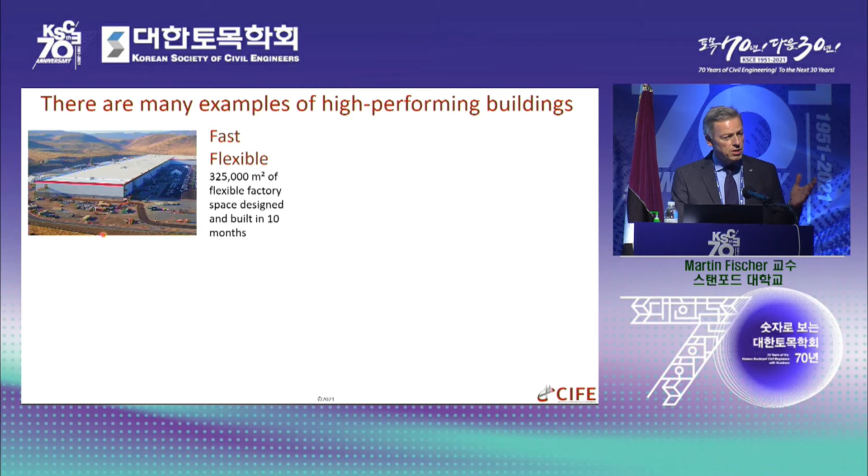So walking around Seoul yesterday for the first time, I saw many remarkable structures, and we see also many remarkable structures around the world. We see many examples of high-performing buildings. Some are created extremely fast and flexibly, like the Gigafactory in Sparks by Reno, Nevada.

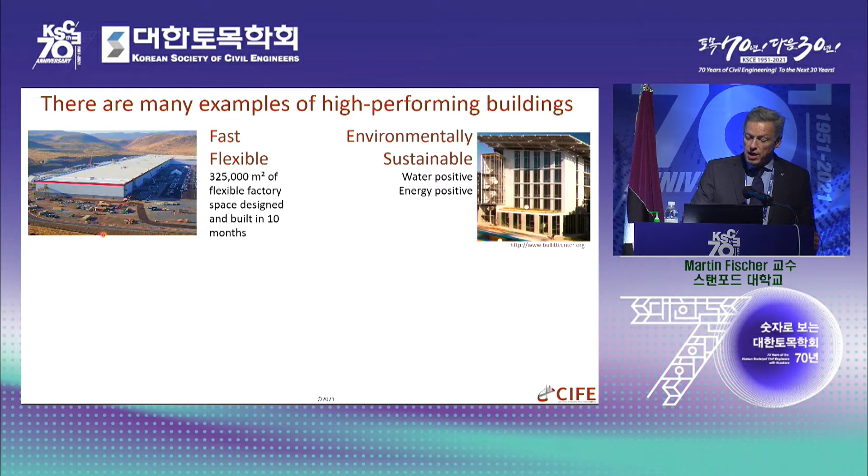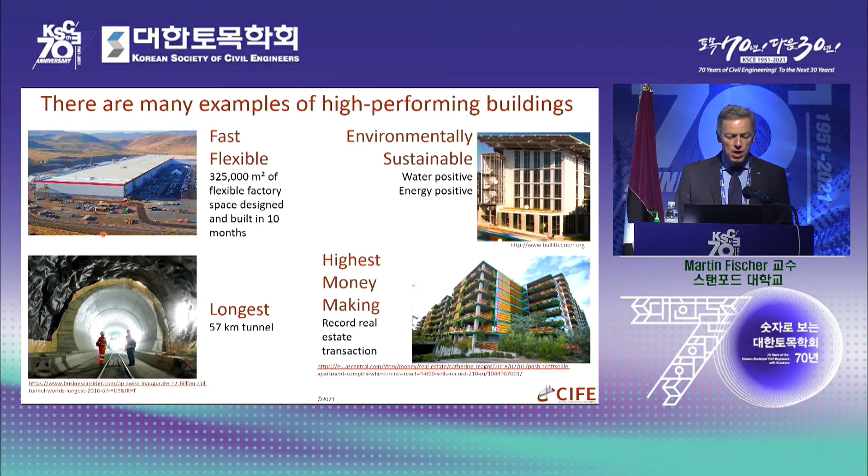Highly environmentally sustainable, water and energy positive, sustainable and high economic return, or just very impactful because of their size, like in my native Switzerland, the longest railroad tunnel. But we have to get more of these types of buildings, as I already mentioned.

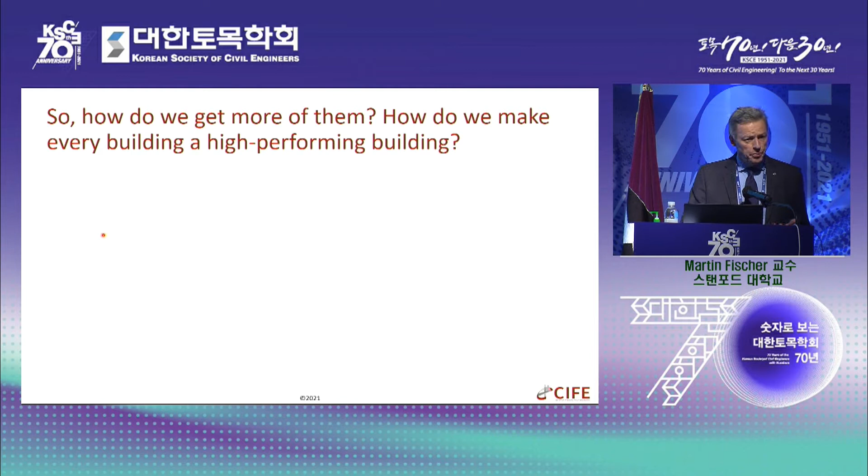So how do we get more of them? How do we make every building high-performing? And of course, technology will help us because it allows us to do things that we haven't done before.

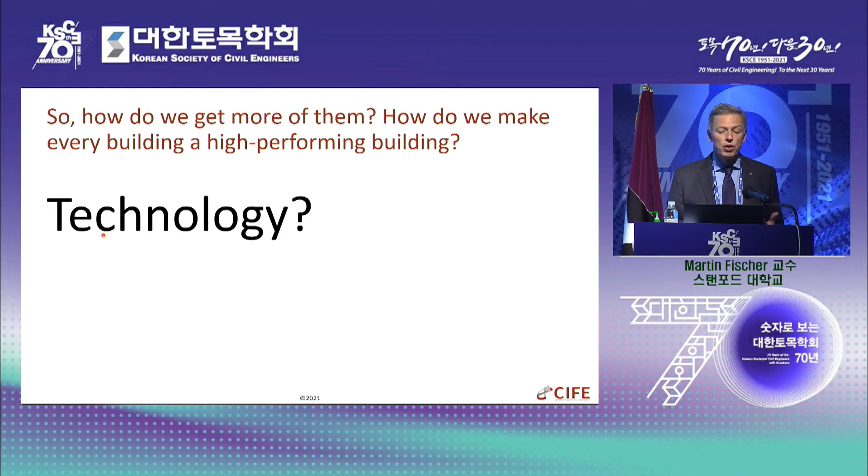So in that sense, technology will be extremely important because, as we heard, we have to do many things that we don't actually know yet how to do. And there is really an incredible number of technologies that are emerging. Just to name a few: many mobile technologies, cloud technologies, technologies around location, dimensional control, scanning, understanding basically the real environment in digital sense, machine learning, artificial intelligence, robotics, additive manufacturing, Internet of Things, virtual reality, augmented reality.

Each one of them is actually already a big deal and could have a big impact. But we hear every day about advancements in all of them, and together they will really enable a very different future of civil and environmental engineering.

So technology will help, but it's not enough. We also have to have a strategy and method. So I will introduce a strategy and method that we have found is very helpful to creating more high-performing buildings, and then share examples of advancing digitalization so that we can go beyond the current limits of performance for our projects.

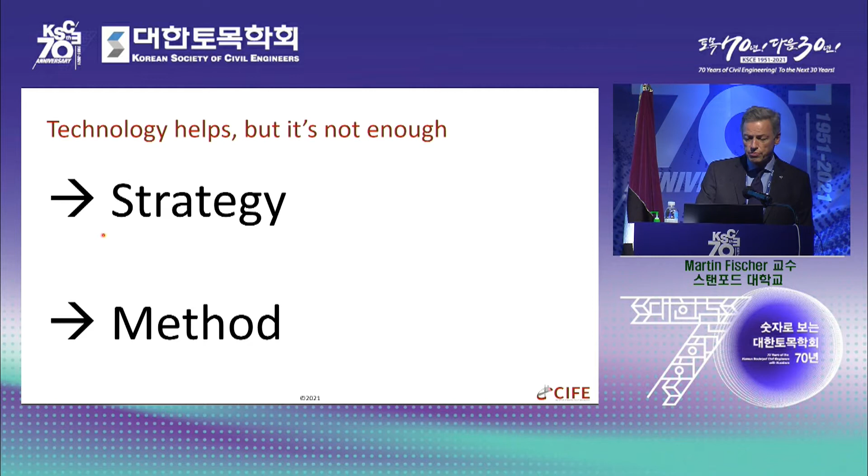So we have to start first with what we need to achieve. How do we know that a building is high-performing or a bridge is high-performing? How do we differentiate one from one that's not so high-performing? So we have to define characteristics for high-performing buildings.

When I use buildings, I really mean buildings like we're in, but also infrastructure as a general term. This is something that's actually been a bit of a surprise to me in my career. I've had the pleasure over the last decade to work with well over 2,000 professionals to advance their knowledge through professional education around the world. And what they struggle the most to do is to define for their project what is actually high performance. What are the objectives for the projects? It's really surprising, but that's what we have found.

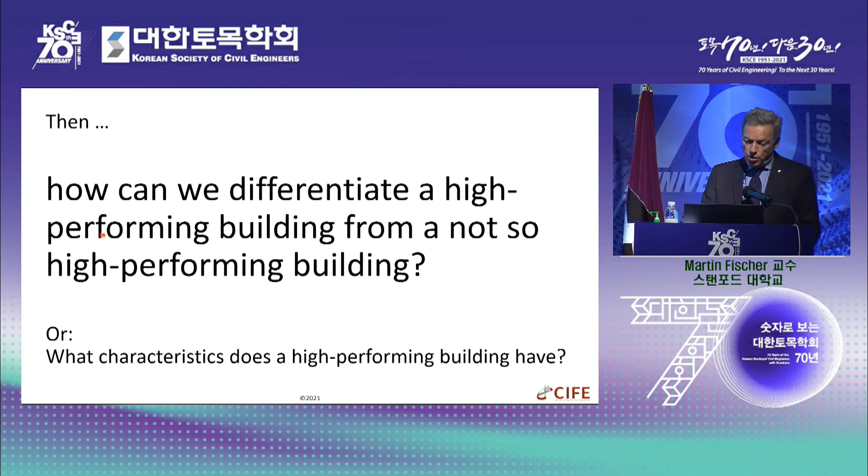First of all, a building or infrastructure has to be usable. Otherwise, what's the point? If it doesn't support its users in health and safety, functionality, and many other features, I think a building that is not usable is really wasteful. It also has to be buildable because, well, if you don't build it, then it doesn't exist and doesn't help the user. And there we have the classic objectives from safety, schedule, cost, and quality.

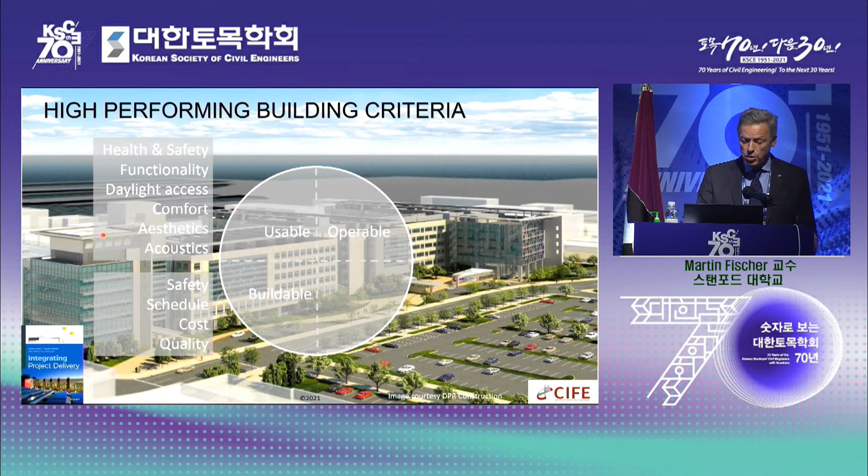And it has to be operable. The people running tunnels, running hospitals have to be able to do so safely, and with efficient energy and water consumption, but also efficient maintenance and operation procedures. And it has to be sustainable, economically, equitably, socially, and ecologically or environmentally. There's lots to do, right? You can see very few projects can say we are performing really at a very high level in all of these aspects.

And that's why we need to integrate the knowledge of all the project team members and support them with really the best tools possible that we can think of, that we can make.

So now that we know how to define, how to recognize a high-performing building from a not so high-performing one, what strategy should we use to get one?

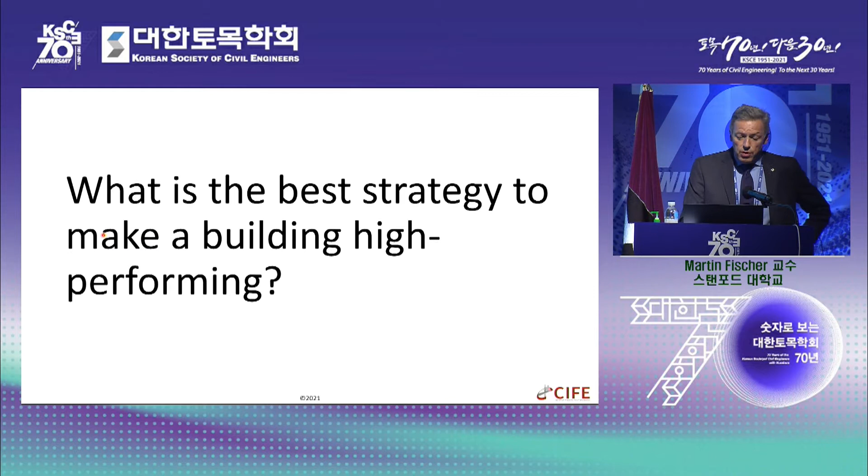As I was working on the book with my 3 co-authors, we really thought about this very hard because we wanted to create more high-performing buildings. So what would be a strategy for a building so that it would be more likely to be high-performing than not? The best strategy we could think of was that it needed to be a building for which the building systems are integrated, work together, are synergistic. That also goes for a tunnel, goes for a bridge, and so on.

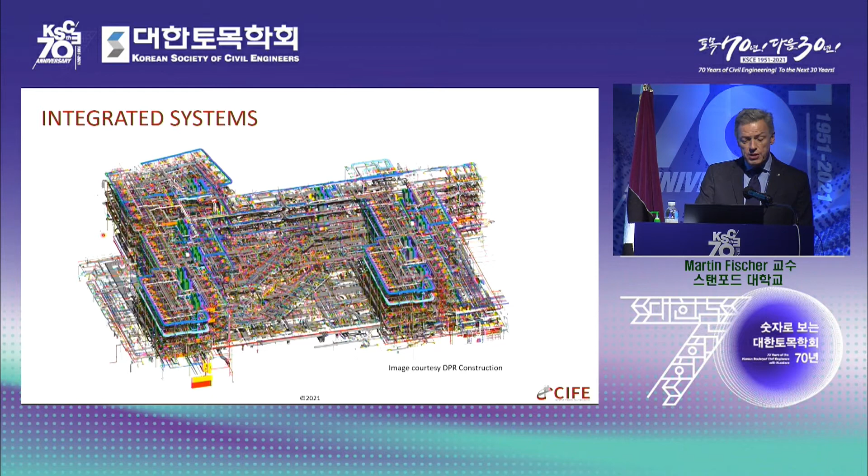We can understand the integration through computer models, not only, but certainly one important way to understand it here, the set of integrated systems for a large hospital in California.

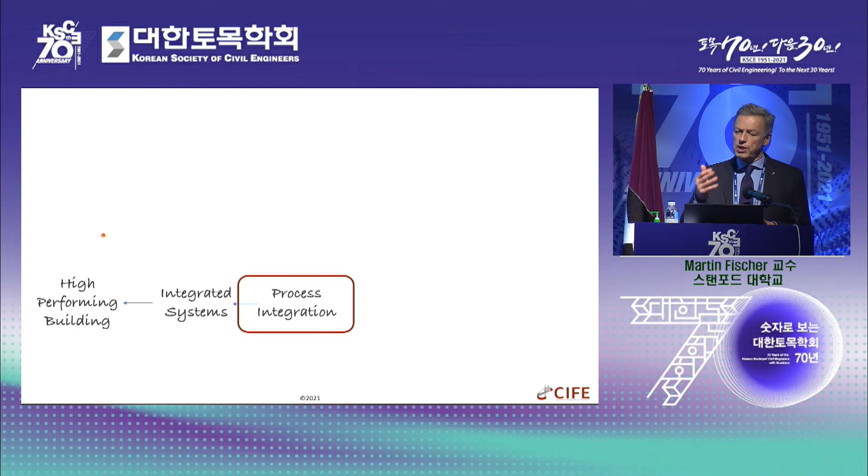So then how do we get a building that has integrated systems? Because that's what we have established is the best strategy for high performance. It means really that we need to integrate the processes, the workflows that create it. And this is quite a departure from what I see around the world, where I see many fragmented, isolated processes, siloed processes, as we say in English. So this is quite a change that we have to still work quite hard, I find, around the world to make happen in our industry.

Because it's crazy to think that separated processes would create miraculously a building with systems that happen to work together very nicely.

So to create integrated processes, we really need to ask the project team to make that happen, which also becomes an important part of creating an integrated organization, which is, of course, the best strategy to create these integrated processes. Because again, if we silo each of the disciplines, like we still often do in many parts of the world, by themselves, then we make it very difficult for those organizations to create integrated processes.

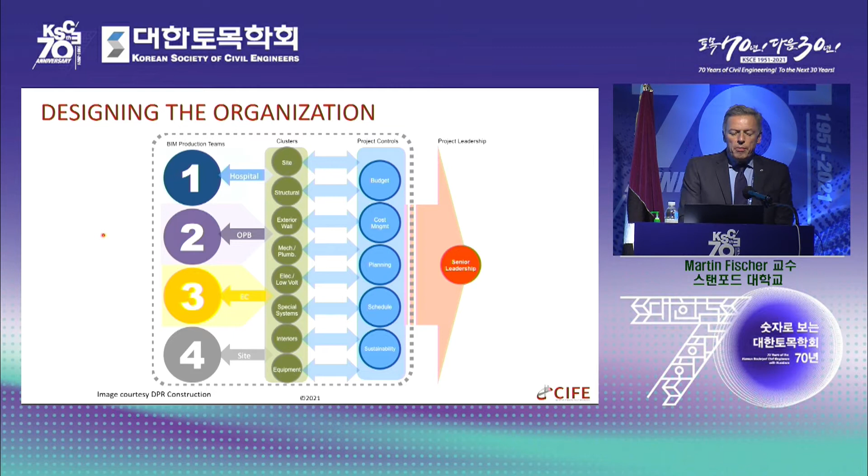An organization cannot do very much without good information. We have to bring the information from different parties together so it can support the organization. As one of my former PhD students said, the information should work for the organization, not the other way around. But too often today, we still have to work for the information, and then we lose focus on creating a high-performing building.

We see many emerging technologies, and now tools like BIM are very common. They connect design and construction, as you can see on this project in San Francisco. This is now very common around the world, I'm sure also here in Korea. What we have found is that a strategy of integrating information, the organization, the processes, and the technical systems gives you the best chance of creating a high-performing building.

As we reflected on that, we realized this is quite different from how many projects are done. They tend to be broken up by disciplines, broken up by phases, and it's really crazy to think that would create a high-performing building, a resilient building, a sustainable building, a building with a low carbon footprint or carbon neutral. So I think we have to get out of our current way of organizing projects into more integrated ways.

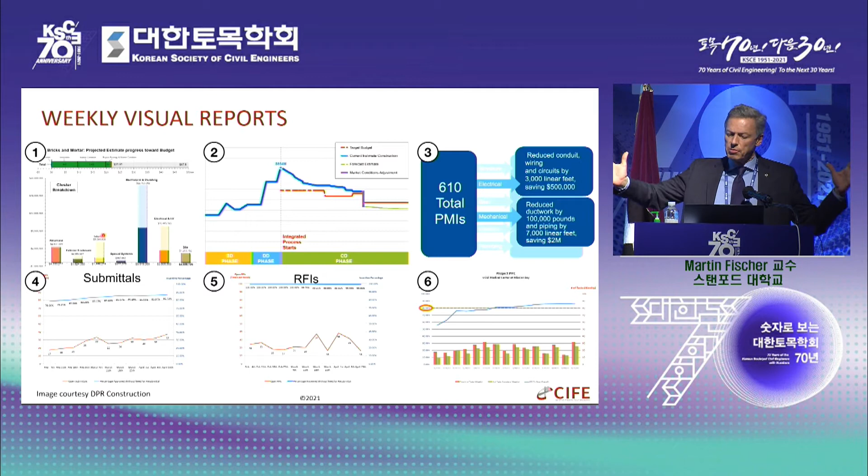Again, this was the same hospital in San Francisco. This was hugely impactful to show everybody publicly on the project team every week how the project is going, where we need to get better. It really galvanized them to a higher performance.

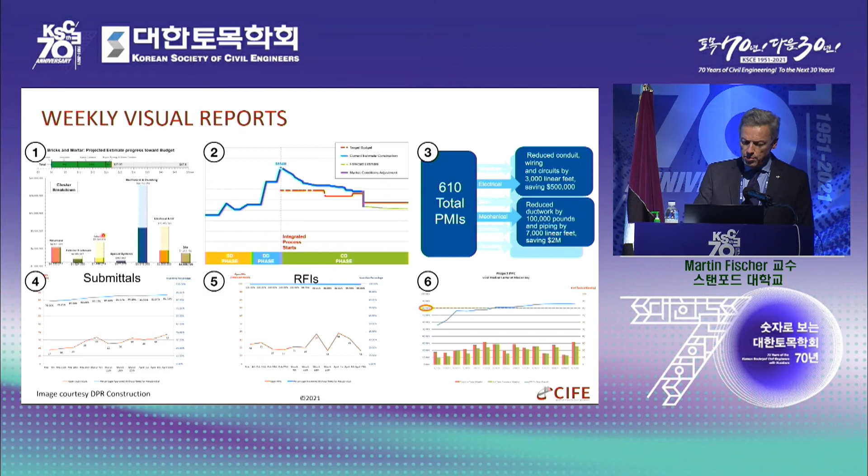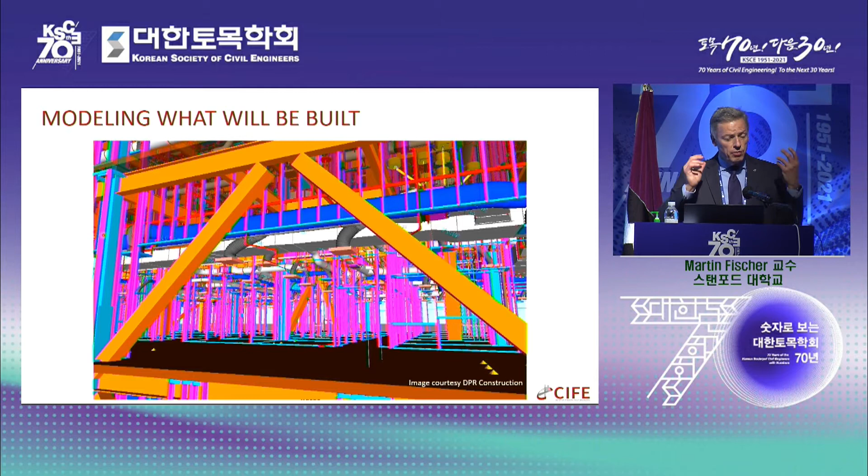To make this possible, the visualization of the current state and envisioned future state of projects is extremely important. So again, BIM, but also other visualization methods, as you will see later, are very impactful to avoid wasteful processes, to get everybody on the same page quickly, and to allow the vision from the design to be translated into construction. This allows us to connect the ideas and vision of the project team with the performance the building needs to have.

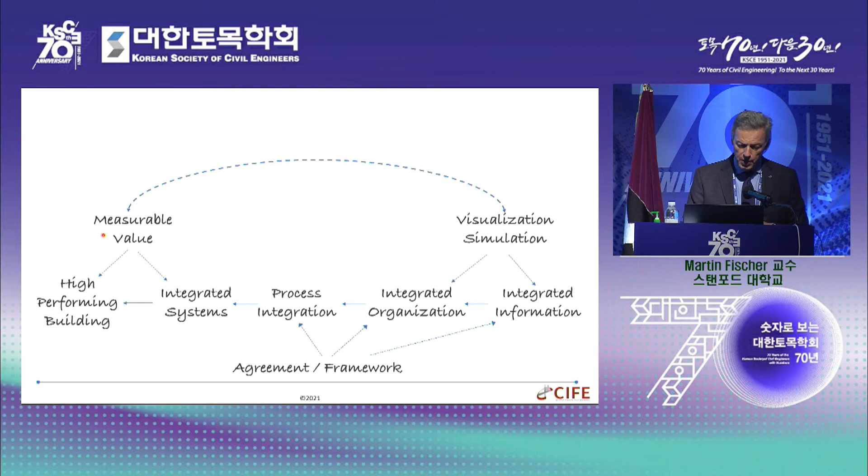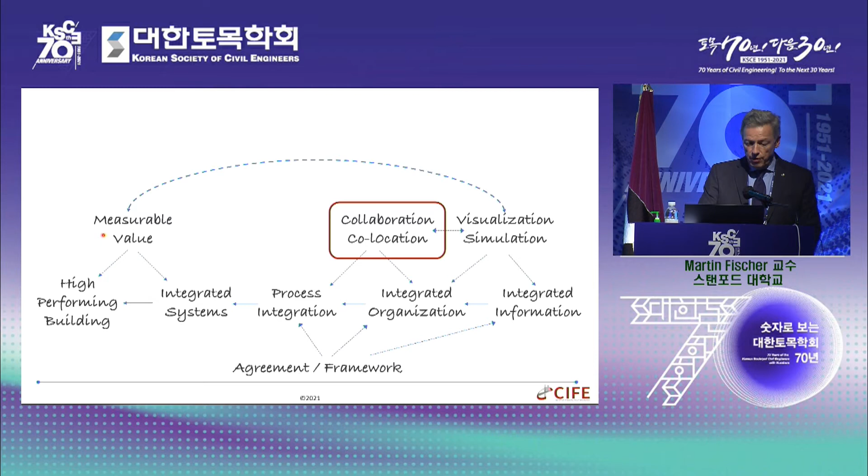Then on a day-to-day, week-by-week basis, we need to find ways for the different disciplines to collaborate together. We have found co-location, collaboration, collaborative sessions extremely important for this, because without the co-location of the professionals—and of course this happens digitally as well today—

we have cycles of answering questions, of creating decisions, that are too slow, and we cannot create good solutions quickly enough.

And we need to manage the production. We need to manage the physical production, of course, but we also need to manage the digital production. We have to see the design really as the digital production of the building, which is connected with the physical production, and also looking out to the digital and physical management of the operation phase.

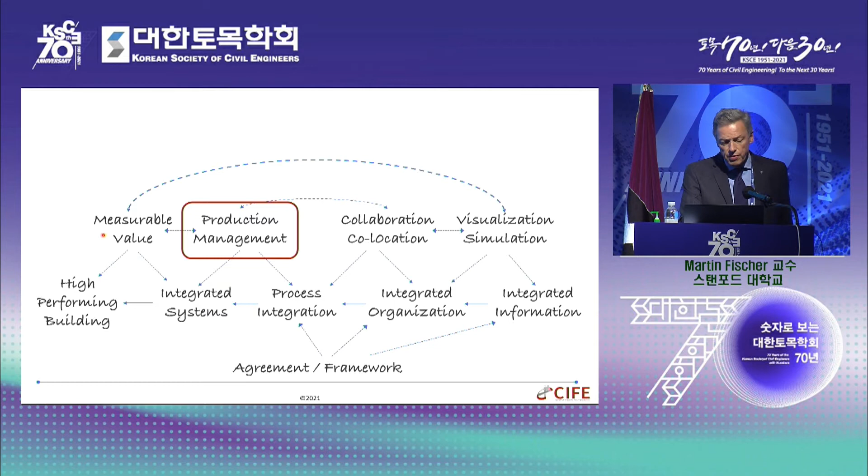Here we can use techniques from lean construction, from production management, operation science, and it's very important for the project team to create a shared understanding at a very detailed level of the workflows. Without that, you cannot manage the production.

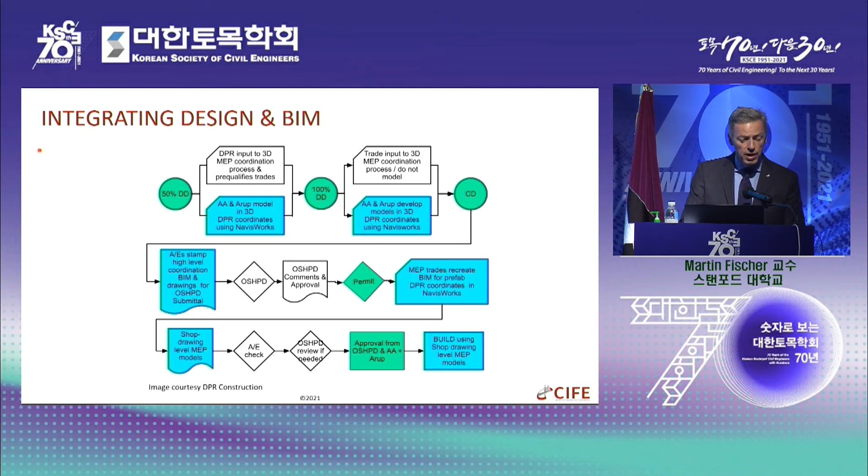I showed here examples from a hospital project in San Francisco that was actually a public project, so it could not really use a fully integrated contract, because that's often an excuse I hear—we can't really have an integrated contract, so we can't do all the integration that you talk about, Martin. But they were able to create the integration anyway through the strategies and methods I very quickly illustrated.

So this is what we found high-performance teams do to make their projects perform well. They follow the strategy of integration and then this method of what we call virtual design and construction, supported by building information modeling. These are three terms used around the world: IPD, integrated project delivery; VDC, virtual design and construction; and BIM, building information modeling. This is how they fit together and support each other. We found that projects that execute this way have a much better chance of succeeding than when they don't.

Sometimes we also show the VDC framework to create an operational model for project teams, where we say we have to define the value and performance you're seeking in terms of what the client wants and what the project team needs to achieve. Then we need to support it by how the people work together. We call this integrated concurrent engineering, supported by the right workflows, processes, and information.

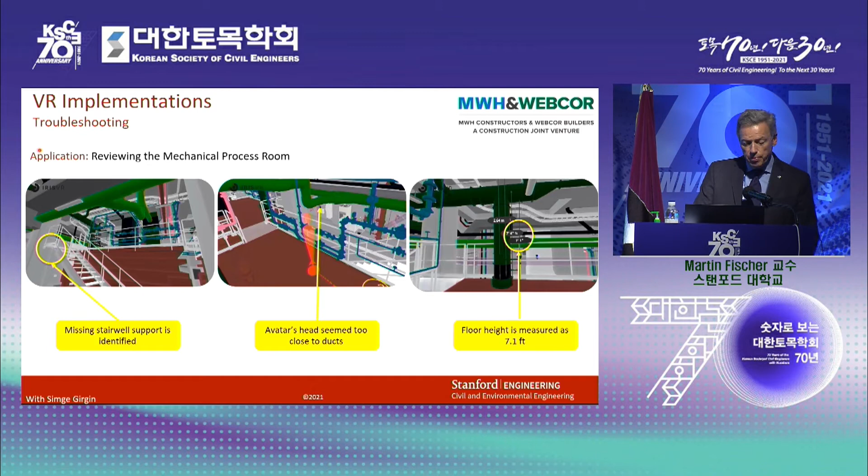So the first one is around virtual reality, where one of my PhD students, Simge Girgin, was able to work with the project team on the largest wastewater treatment plant project in San Francisco to make it as buildable, usable, and operable as possible. They did this while being in home office, so everybody had a virtual reality headset and could participate in design review sessions to make sure the water treatment plant was as maintainable as possible, or just to participate in review sessions to understand the status of design.

As we see here, everybody was in their home office wearing a virtual reality headset and having an avatar be part of the same review session, dramatically shortening the review cycle time to make sure the design is as good as it needs to be.

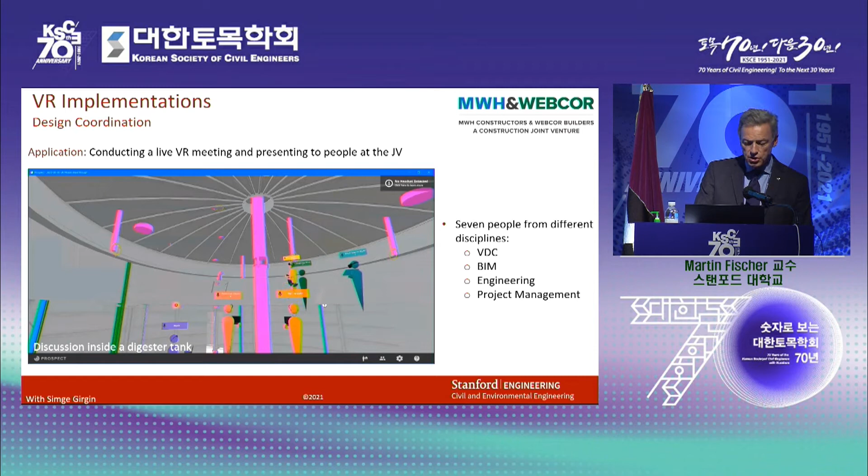Another key technology is optimization methods, typically multidisciplinary optimization, because our projects are multidisciplinary. Here I want to share research by Filippo Ranalli together with our longtime partner DPR Construction and their project partners, because unless we optimize our structures, we're not using our resources well. We're wasting resources, and we simply can no longer afford that.

But today's methods don't really allow us to optimize the structures we create, because the data and knowledge is too fragmented, and we haven't yet formalized the different analysis and design methods. So Filippo, together with our industry partner, was really able to take the optimization of a structural steel structure for a building to a new level — not just optimizing for minimum weight, but optimizing for minimum material, fabrication, and erection cost, considering all the code requirements and detailing. Really integrating the gravity and lateral system design and detailing to create an optimal steel structure for a good-sized office building, for example, that you would find in a downtown area, in about an hour.

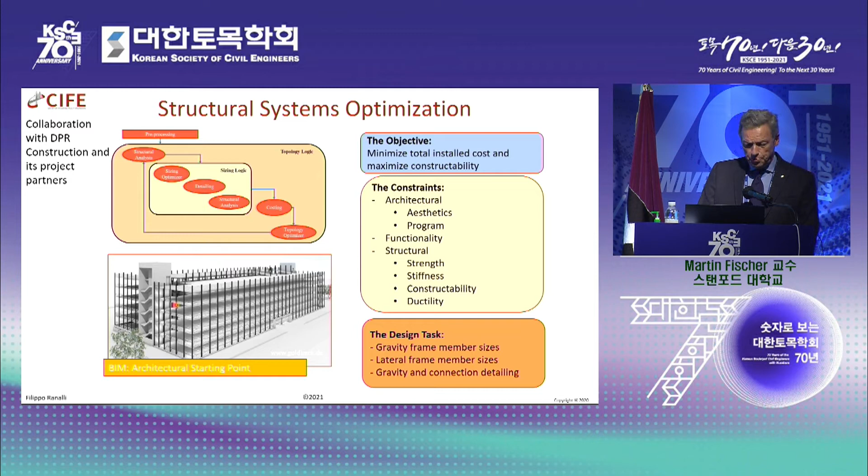So basically, he taught the computer everything we know how to do, so it can do that. Now the structural engineer can contribute by saving 10 to 20% of material, fabrication, and erection cost, because we have 40 to 100 times faster structural design, so they can actually work on more projects. We have higher structural safety because of doing more calculations, and we can look at thousands of scenarios instead of one or two.

And now the structural engineer becomes a very different partner in the whole ecosystem of architecture, structural engineering, and construction. But if we don't connect the design and construction professionals, we cannot get access to the data, and then we cannot create this kind of optimization. So we have to not only digitalize, we have to also integrate. If we don't create this digitally supported integration, we will keep wasting resources. It's as simple as that, and we simply cannot afford that.

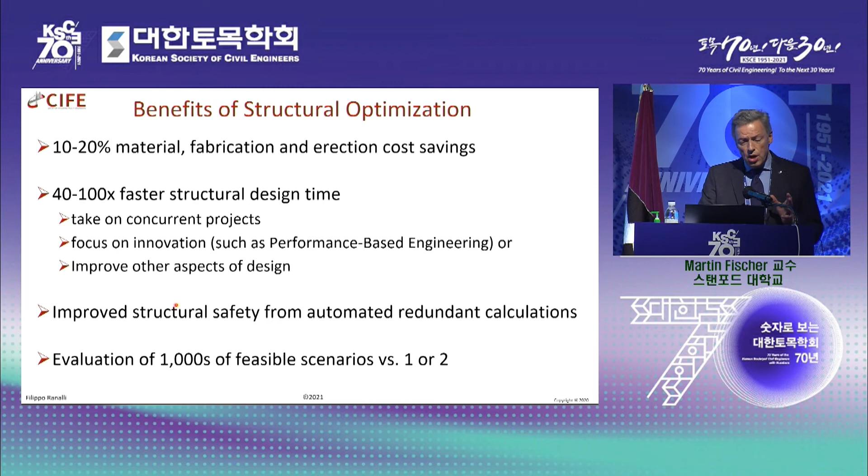This kind of optimization can also be applied to scheduling of construction projects, because the schedules of construction projects commit huge amounts of resources. If you think that labor costs are, it varies a bit around the world, but say 50, 60% of construction costs, and construction is 10, 12% of GDP, we're talking 5 to 6% of global GDP committed by construction schedules.

And it's really also crazy that we create typically about one schedule per project. We have one and we go with it. We do not optimize it.

So we have created in our lab a method to optimize construction schedules by teaching a computer the basics of construction so it can do the simple things and we don't have to enter things into the computer again and again. We basically automate the things we know to do so that the construction practitioner can focus on exploring different

strategies, different combinations of resources to really find the optimal schedule for a particular project. So this has turned into a startup that is now on the market with a tool called Alice that has been applied for building and infrastructure projects.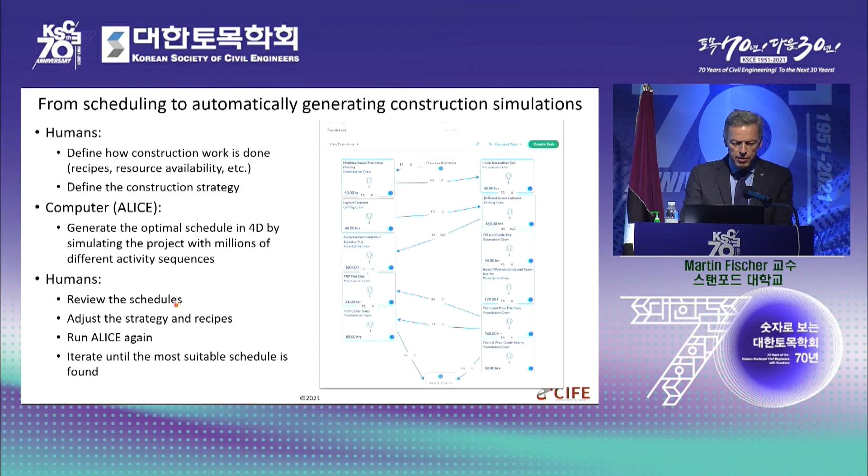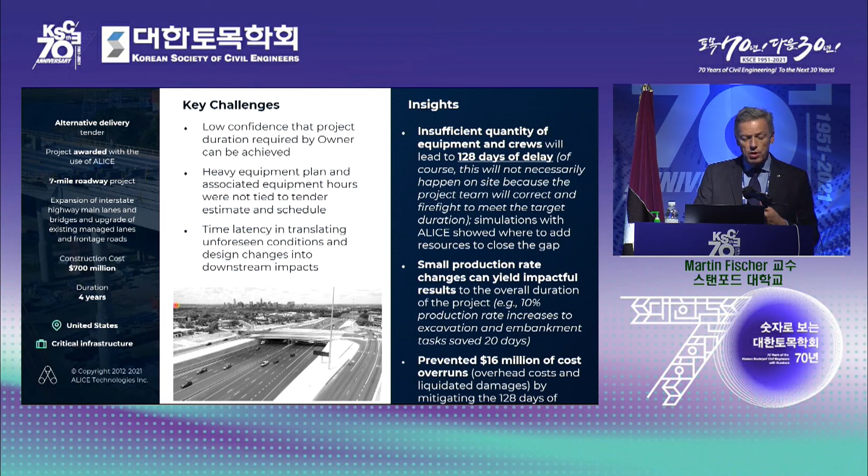For example, on this large road project, the construction team was a bit optimistic in its planning, and as they got into the project, they found that they were going to have a 128-day delay, which of course would have been very costly. By modeling not only this road in 3D, but also by modeling the construction processes, they could then automatically explore actually really millions of different ways of building the project and find the best ones.

Those could only be found because people with different knowledge could sit together and were supported by a tool that automated the basic calculations at a large scale and allowed them to then optimize this schedule.

The same was applied for a project with a road project with a bridge, where they had faced significant design changes and still wanted to finish the project, of course, as quickly and as low cost as possible. And here you can see the project team again evaluated many different strategies for creating a better schedule. This would be a whole hour to talk about all the strategies.

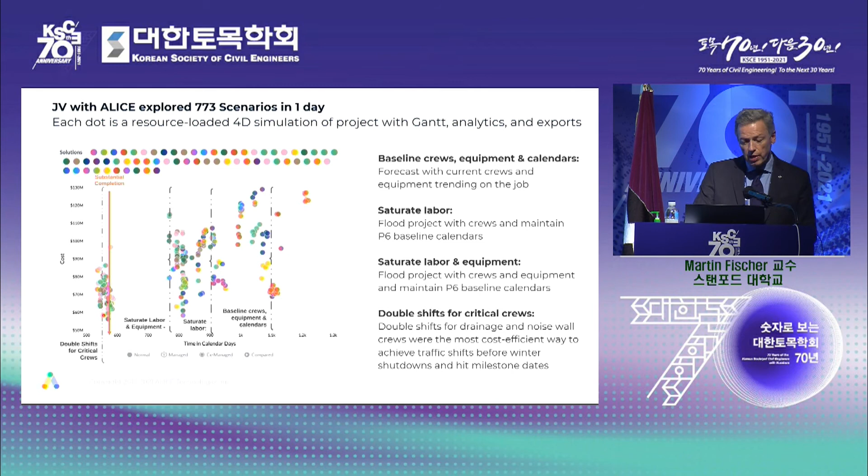So optimization methods allow us to employ the resources, material, and labor in the best possible way. It's certainly a strategy we must employ if we want to build sustainably and high performing.

Another method that is becoming very popular in the US is to use offsite fabrication or prefabrication. But then this creates a challenge of logistics. You have to now connect the factory, which has its production schedule, with a site which has its production schedule. And you want to also have efficient logistics.

And that's where we have seen challenges on projects, and this is work done actually by one of my Korean PhD students, Yujin Lee, who is now a postdoc in my lab. And she worked with, at the time, Katerra and Digital Building Components, and now with the Microsoft Data Center Group to continue to expand these methods.

Basically, what we found as we talked to companies that use this offsite fabrication is that the logistics people were stuck between the factory people with their objectives and the site. And there was like a fight, the trucks are not loaded in the right way. And this actually added significant cost to the project, taking away many of the advantages that the offsite fabrication created.

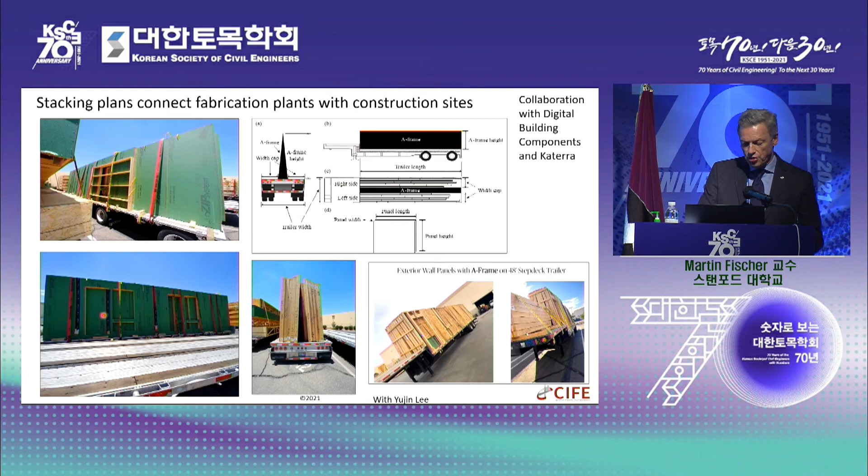We then created two metrics to look at the quality of each truckload, which is really the connection between the factory and the site.

We focused on the stability of the load during transportation, and also the effort needed once the truck arrived on site to install these panels. We asked them, how many panels are you okay to reshuffle? They said 17%. We defined this metric of stack stability and asked, given this metric, what is the minimum level of stability you are okay with?

They said 50%. Then we got data from 253 truckloads on a project, and you can see that very few fall into the acceptable range. This was amazing. They knew they had a problem, but didn't quite know how big it was. No wonder they were fighting and shouting at each other, because they had so few good truckloads and so many bad ones that led to too much work on site, or were too unstable and led to too much work to make them stable.

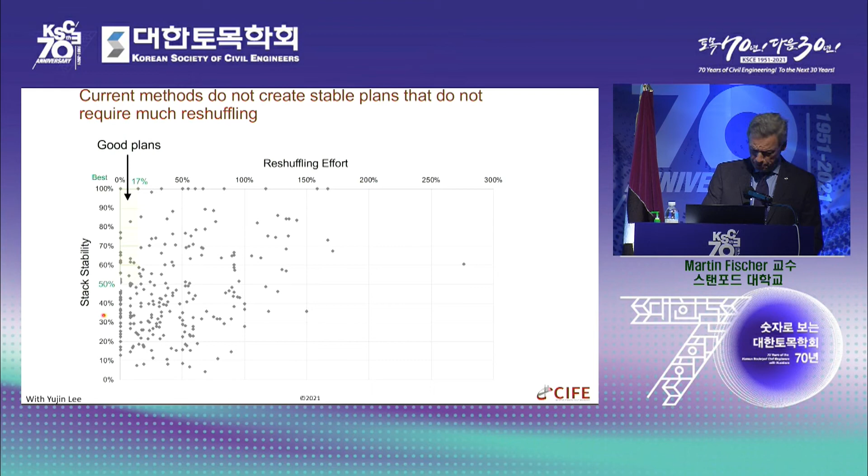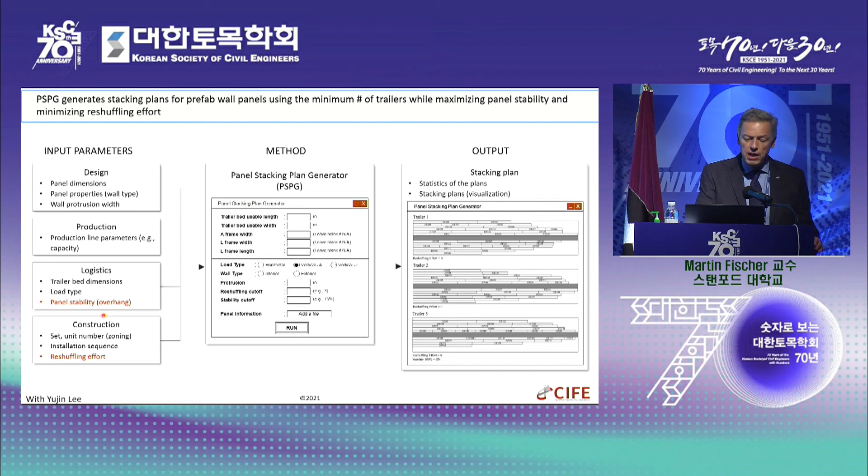So we developed a tool, again digitalizing this problem and the solution, which allowed us to create automatically, in 2.5 seconds instead of 40 minutes, loading plans for these trucks that eliminated all the reshuffling efforts, improved panel stability, and reduced logistics cost by 23%. This is an example of where we have to keep digitizing our practices, because otherwise we create these breaks in our work and again create suboptimal procedures that lead to suboptimal results.

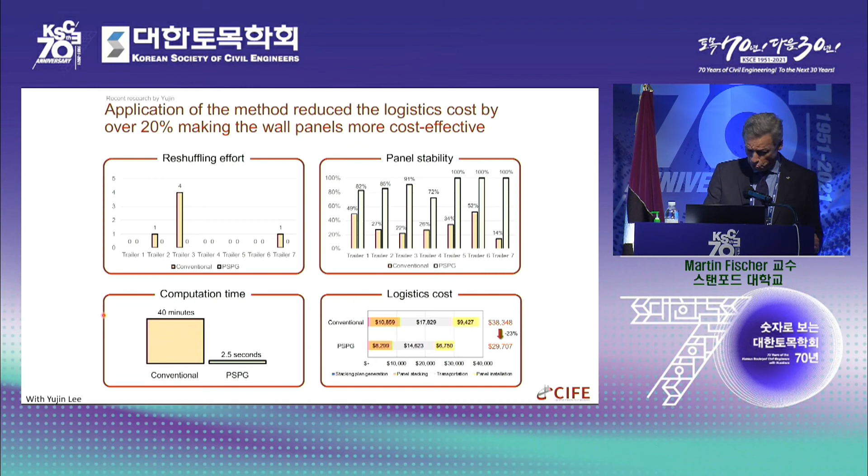I'm really excited about the increasing access to data we have. I'm already seeing a lot of data being collected, but not so many methods to actually do something with it. But we can finally create what I call digital feedback loops, so we can actually learn. Because that's another thing in our industry - it's extremely difficult to learn because there are so many disciplines involved and projects take so long. So how do we learn what are really good practices? But with these digital feedback loops, we can actually finally learn.

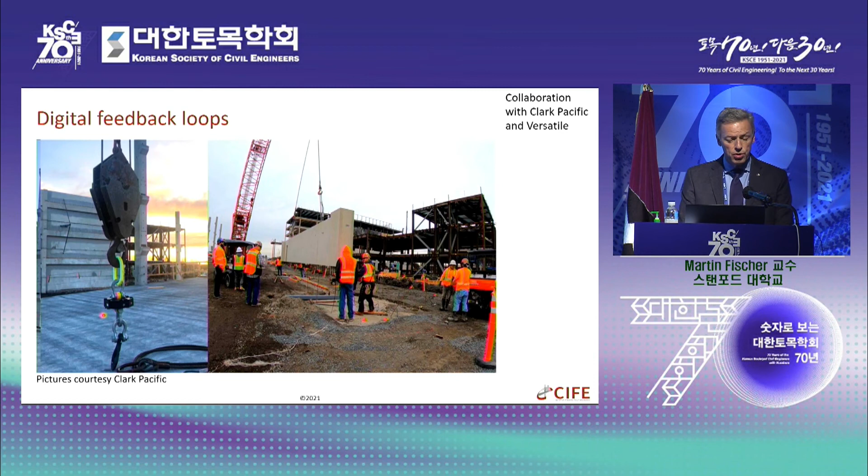This particular example is from a collaboration we had with one of my other PhD students, Yan-Ping Wang, and Clark Pacific, a precast company on the West Coast. They built, for example, the Apple campus. And a startup, Versatile, created this IoT-enabled crane hook that tells you everything the crane is doing. So finally we're able to see and learn exactly what is happening on a job site.

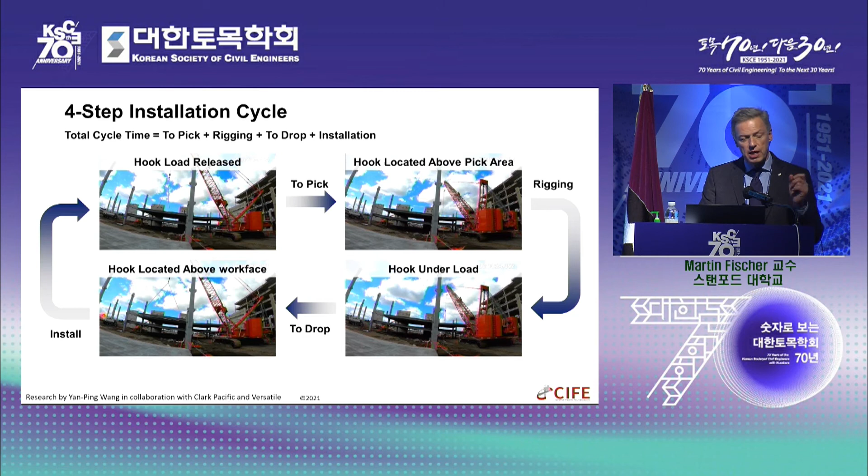So we get cycle times, not an average, but cycle times for every single operation of the crane. And we also get that coupled with video. This becomes a very rich data set from which we can really learn how a project goes.

For example, on this parking garage project, we saw incredible variability in the installation of shear walls on the ground floor. The fastest was 23.5 minutes, the slowest 111 minutes. In lean construction there's a big focus, rightfully so, on reducing variability, but it's been very difficult to get actual data on what variability we have. Here we could finally see the level of variability the project teams actually face. It's crazy - a factor of 5 between the best and worst operation.

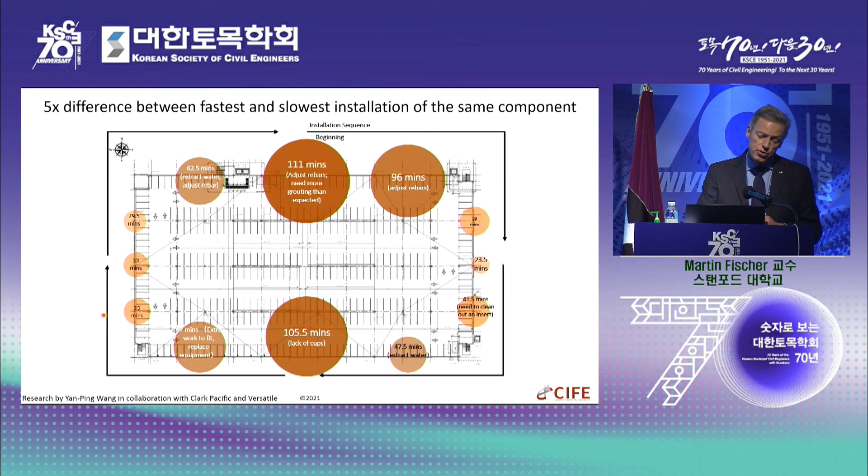Same type of shear wall, same project, same day. This allows you to see why we are slow and why we are fast in a particular case. In this case, it was the tolerance of the rebar that connected the shear walls to the cast-in-place slab. So you can start to find the specific problems that cause you to be wasteful on site. We thought, okay, these shear walls connect with the cast-in-place structure, maybe it makes sense there is some high variability. But we found this continued through the rest of the project.

For example, for the different precast beams connecting to precast columns or precast walls, we again saw, for all 3 different conditions, quite different average cycle times, but also high variability in cycle time.

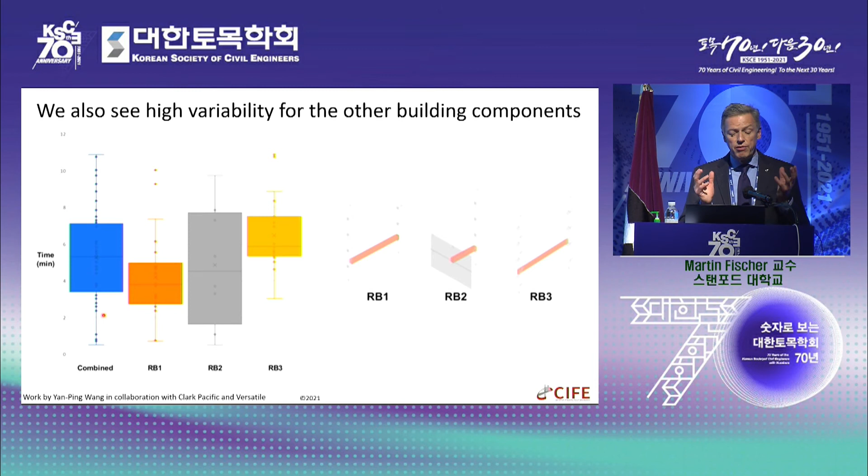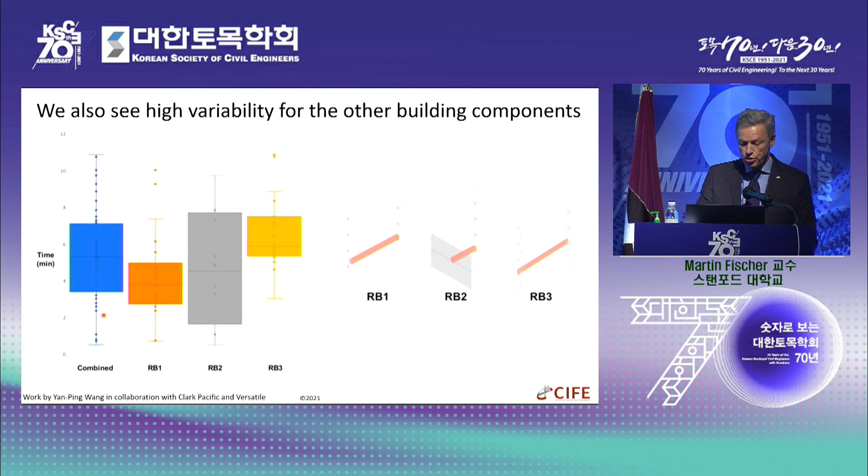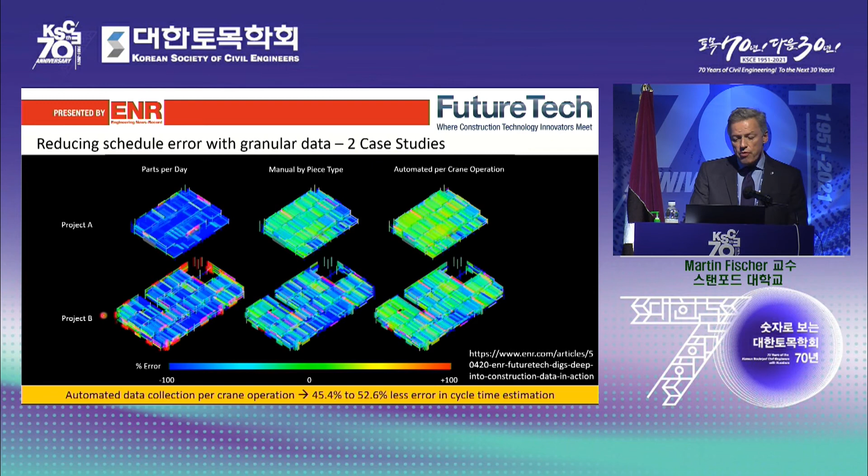So it's really exciting that we finally get this data that allows us to act, not only because we believe something - of course we still have that - but because we actually have data and can agree on a common solution. We can see where on the project we have the biggest discrepancies between how long we thought something would take and how long it did take. We can run simulations and give the project team confidence - we could actually show this project team that they could install 7 more parts per day with a 90% chance of meeting the schedule. Because, again, we had the data to really do this analysis.

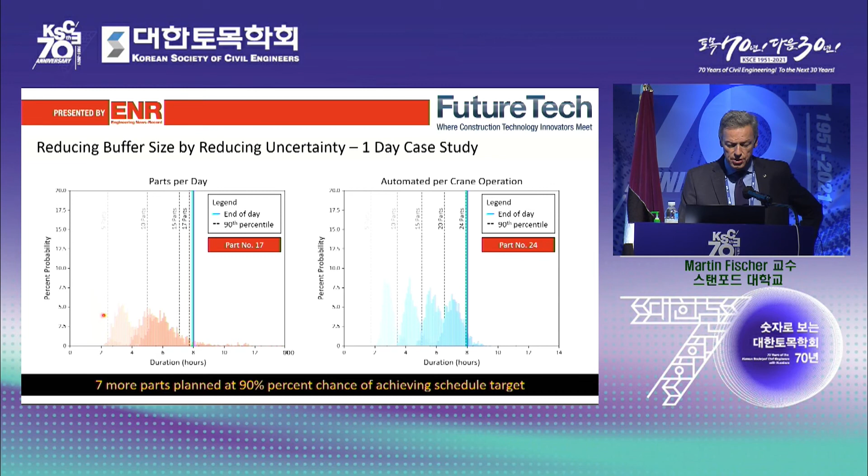Another digital technology I'm very excited about is robotics applied to construction. I have to say I was a little skeptical after seeing the initial tries in the late 80s and 90s in Japan and California, focused on construction robotics. When one of my PhD students, Cynthia Brosque, came to me and said she wanted to study construction robotics, I'm quite amazed at the impact construction robotics already has, especially on health and safety of construction work and on quality. I'll share a few examples.

We were able to do a construction robotics class last winter at Stanford, together with the University of Lima, and studied 10 robots applied by 11 companies across 8 countries. I'll show a few examples from the kinds of robots we studied.

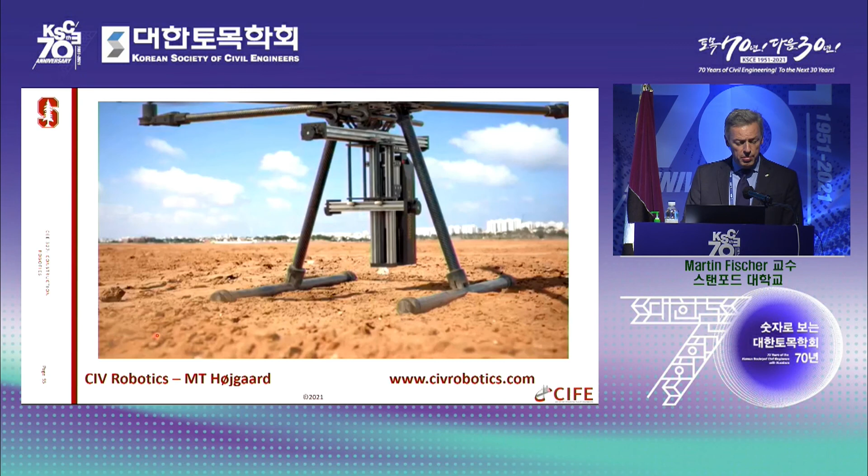Related to civil infrastructure, we studied this layout robot that automatically lays out where things should be built. There's a drone version and a little driving robot version. When we compared this layout with the traditional layout, we found the accuracy improved from 50 millimeters to 15 millimeters, an 87% layout time reduction, and 84% cost reduction. I'd say this is pretty much a no-brainer to apply this kind of robot for these types of projects.

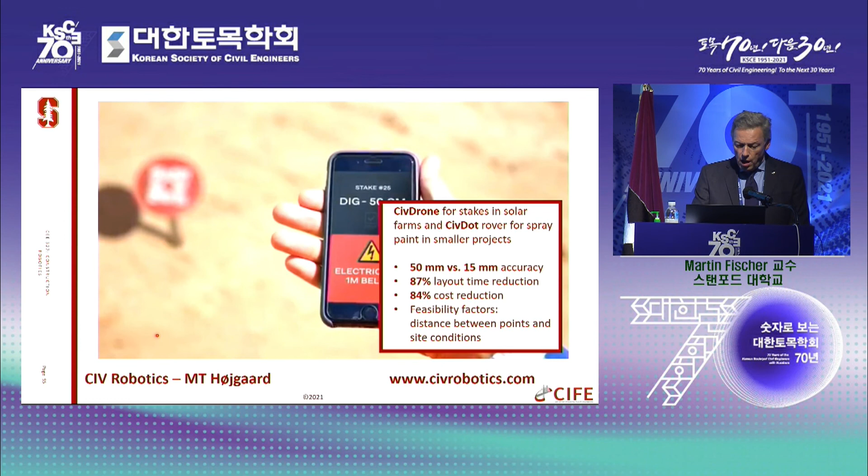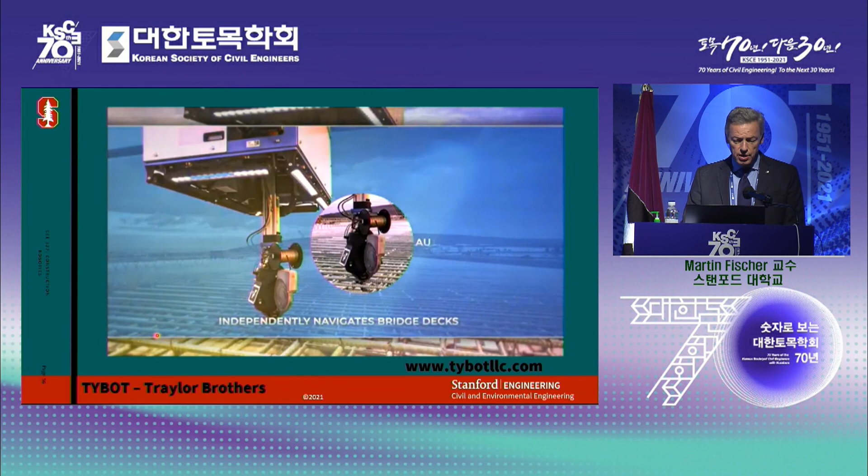We also studied this rebar tying robot that automatically ties the rebar, especially for bridge decks. For large bridge decks, a company called Tybot - we were able to study that with a contractor in the US, Traylor Brothers, as you can see here from the slides.

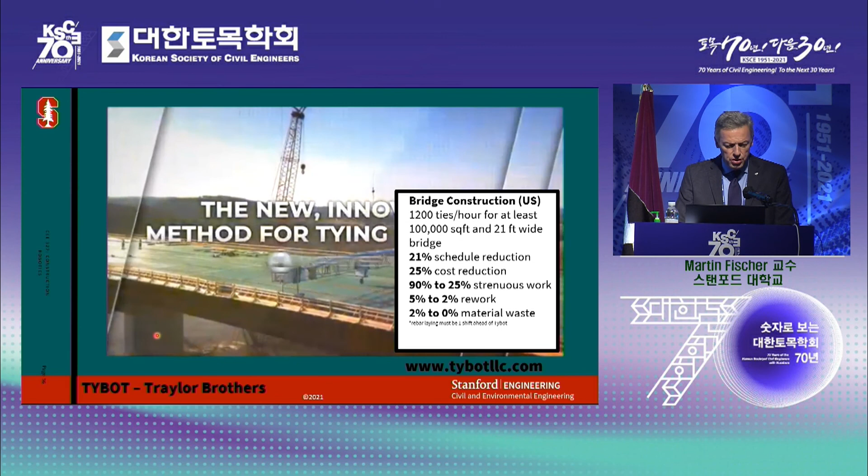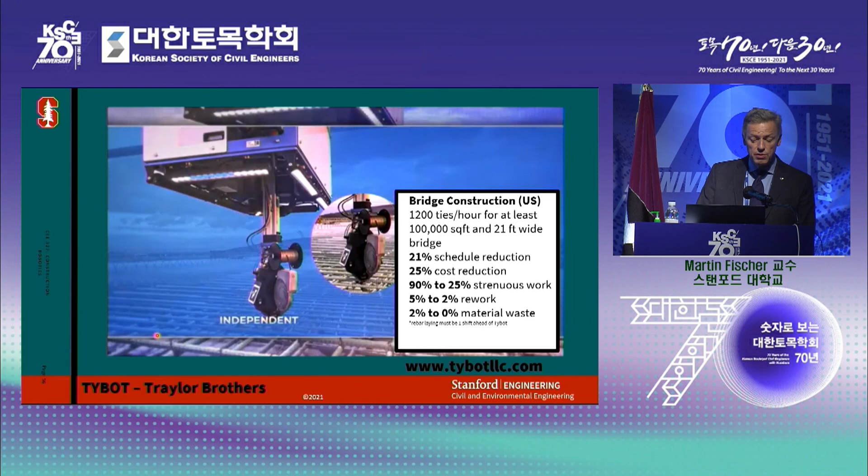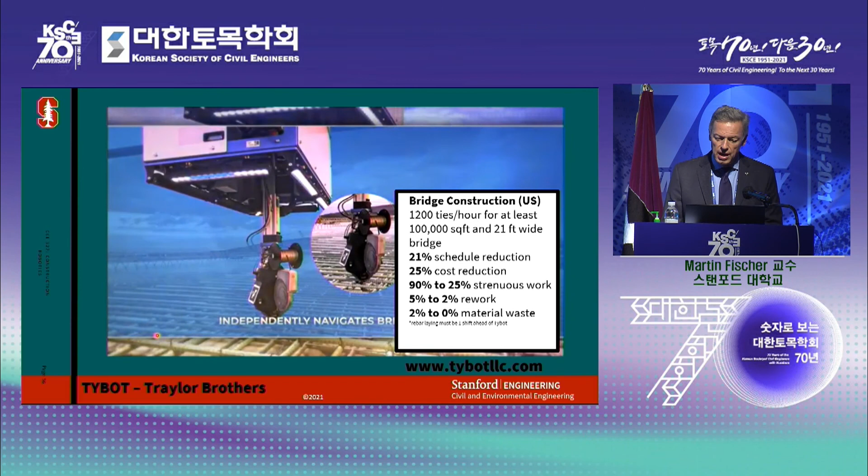When we compared this robotic production with the manual production as we typically find it, we saw a reduction of strenuous work hours from 90% of work hours that are strenuous to 25%. We saw a schedule and cost reduction of 21 and 25% respectively. We saw reduction in rework from 5 to 2%, and reduction in material waste from 2% to 0%. So you can see each of these practices is making projects more higher performing, more sustainable - socially, because we have safer work, less likely to injure workers, and more efficient work.

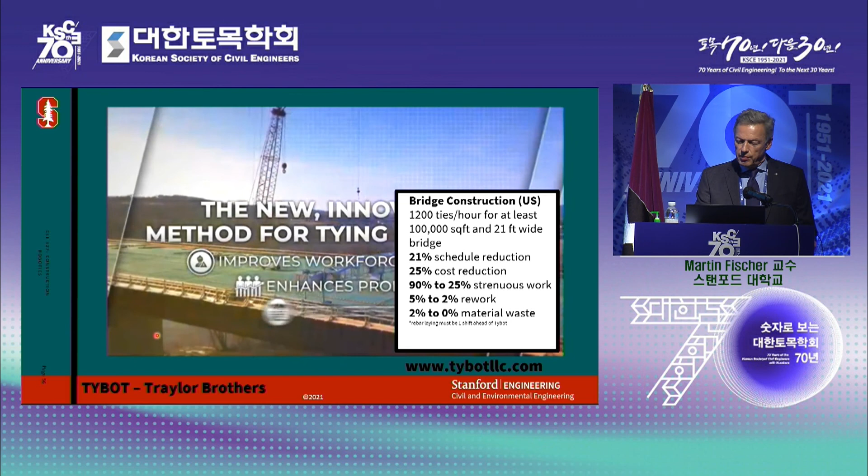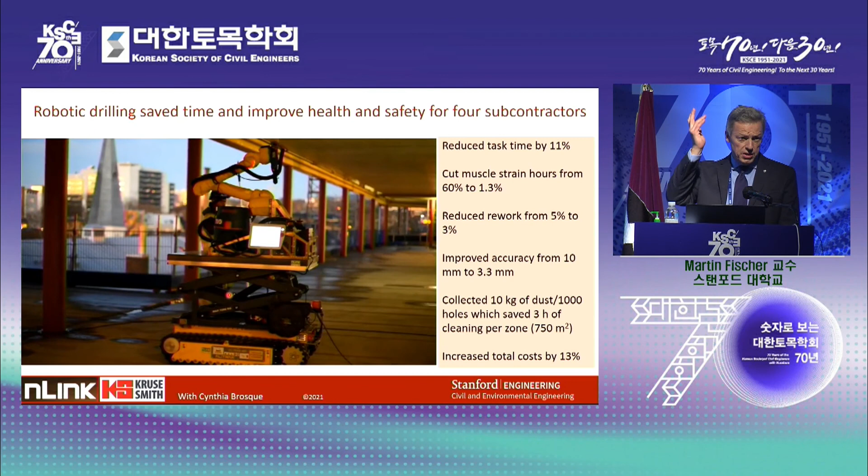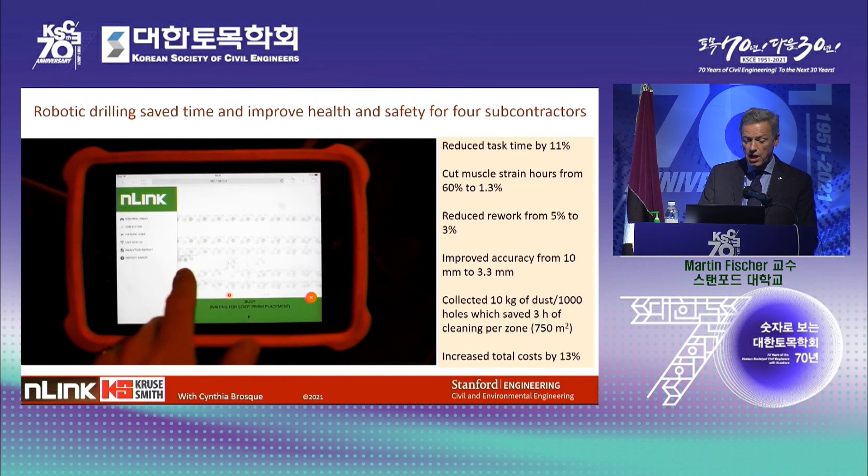The example that continues the story is actually the first robot we were able to study - this drilling robot to install anchors in concrete ceilings in buildings, but could also be used in infrastructure settings. This was the precursor of a robot that's been acquired by Hilti and has now just come on the market again a few months ago, called Jaibot.

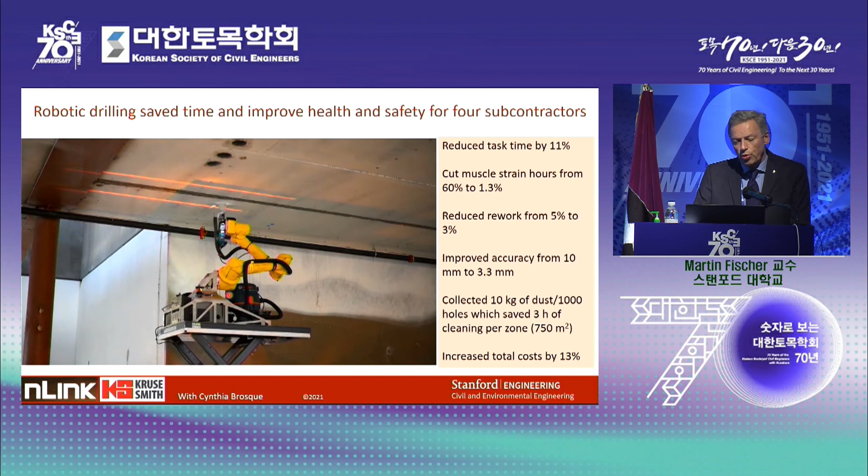Even on the first application of this project in Norway, quite a few years ago, we saw a reduction in task time - not so huge, but still 11% - but really a dramatic reduction in strenuous work, 98% reduction. I think that's fantastic. Rework reduction from 5 to 3%, improved accuracy from 10 millimeters to 3.3 millimeters, and basically an automatically clean site.

So I see robots, and especially the collaboration of humans and robots, very much in our future to create better projects for us and for the environment, for society.

The other thing I want to say about robots is, as I thought about imagining 5 years of work with robots, I was thinking, who will know more about construction - the robot company or the traditional construction company? And I would think the robot company will actually know more.

So I think it's quite important that those of you who work in traditional construction companies get to work with robots sooner than later, because you get the data automatically. When we did these comparisons, when students worked with project teams around the world to make these comparisons, it was very easy to get the data from the robot companies. It was very hard to get the data about the current process - 'oh, we don't really know, we have to guess, we don't have the details,' etc.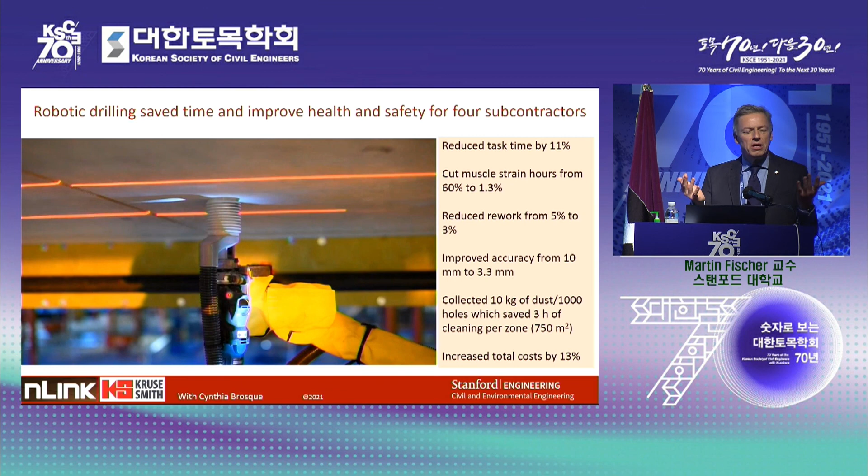But it's very clear, as you could see from the optimization example I shared, if we don't have the data, we can't optimize, we can't use resources efficiently. So it's crazy for us to claim we are building sustainably and creating the best projects possible. For me, all of these methods in terms of data collection, data analysis, optimization, visualization really come together to enable a multidisciplinary team of professionals to create great projects every single time.

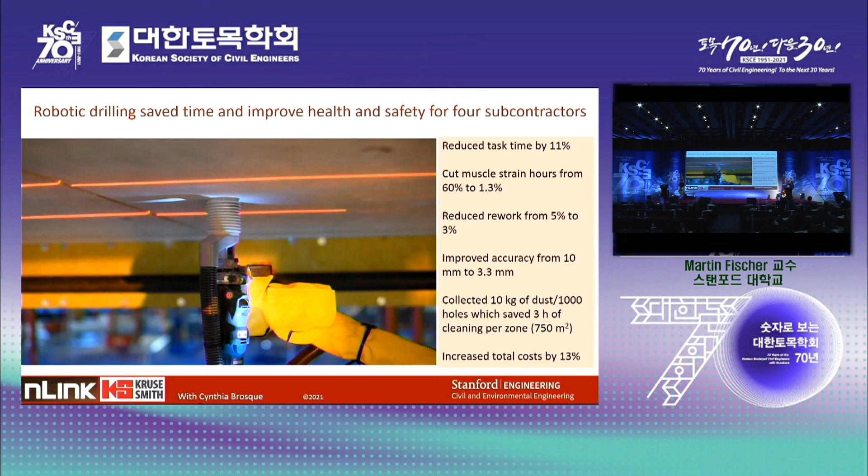And I hope I was able to show that to you through the strategy of creating high-performing buildings and through the technology that is emerging and that we need to learn how to use. That's basically what I wanted to summarize with the last few slides - just to remind you of the key strategies and methods I pointed out.

But we see it every day in our lives, right? When we work together and use good tools, we can achieve dramatically better results. And we know that, so we should actually do that for our projects, and we should do it all the time. I look very much forward to that future of construction and to working with you on making this happen.